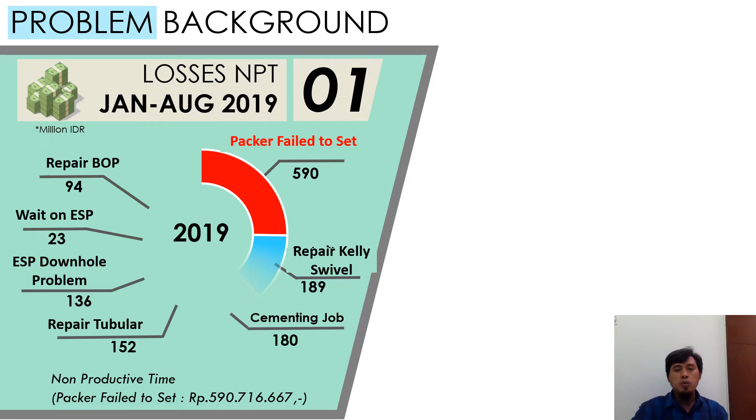To start this project, my team and I tried to find the background of the problem. First, during January until August 2019, there was much loss of time in well intervention jobs. We call it non-productive time, and the biggest one is packer fail to set. It costs about 590 million rupiah. And the second one is the KPI target from the well services department that must be achieved in 2019.

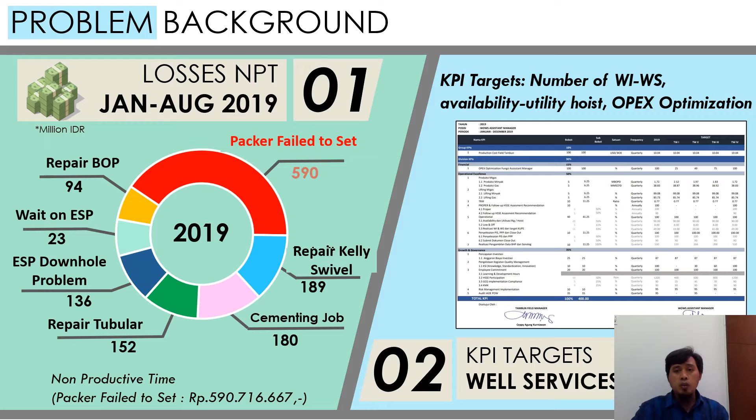And the KPI targets are number of well intervention and well services jobs, availability and utility of hoist, and also OPEX optimization. Setting a target to achieve is related with inspire a shared vision. I try to paint the big picture of what we want to achieve, and I speak with genuine conviction about the purpose of our work to my team.

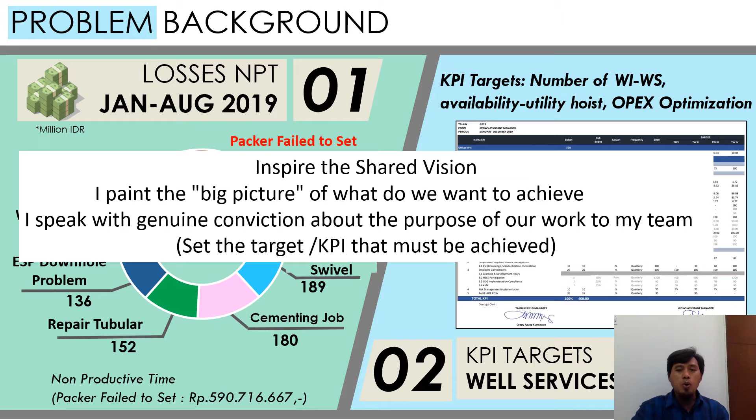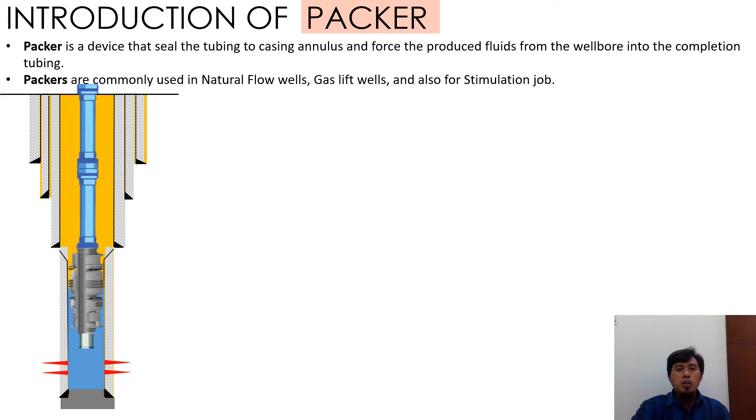The biggest cause of NPT is packer fail to set. Then the question is, what is a packer? A packer is a device that seals the tubing to casing annulus and forces the produced fluid from the wellbore into the completion tubing. Packers are commonly used in natural flow wells, gas lift wells, and also for stimulation jobs. Before we use a packer, the packer must pass a visual check. And this is the procedure.

First, make sure there is no damage to the thread on both the top and bottom connection. Second, make sure the grip is not dull and worn. Third, make sure the drag block is not worn. Fourth, the seal condition on the top sub must be clean so it can seal optimally. Fifth, the mandrel is clean from dirt or sand and has no scratches. And the last one, packing element: the two end elements are hard and one center element is soft.

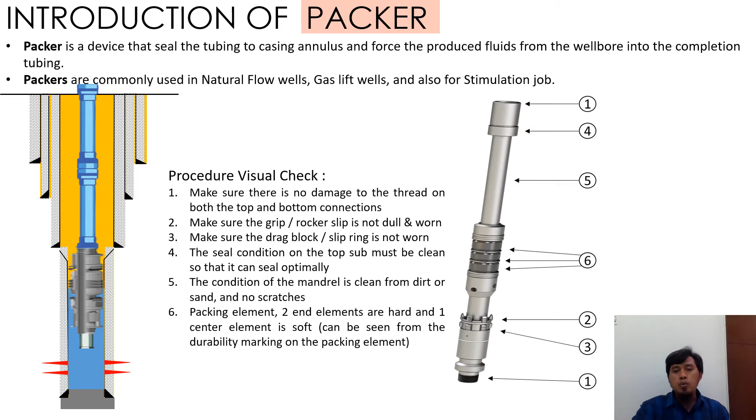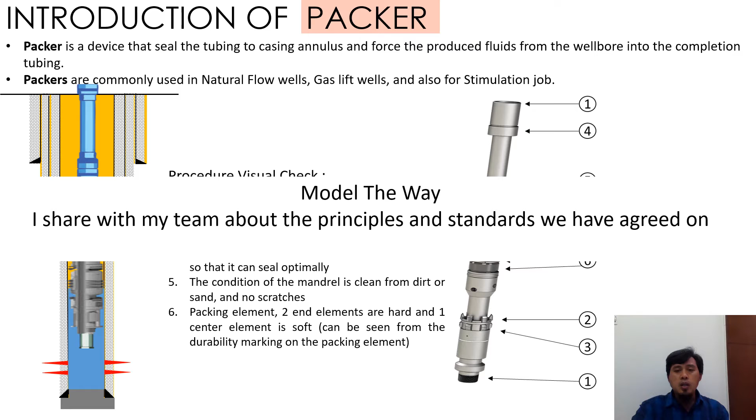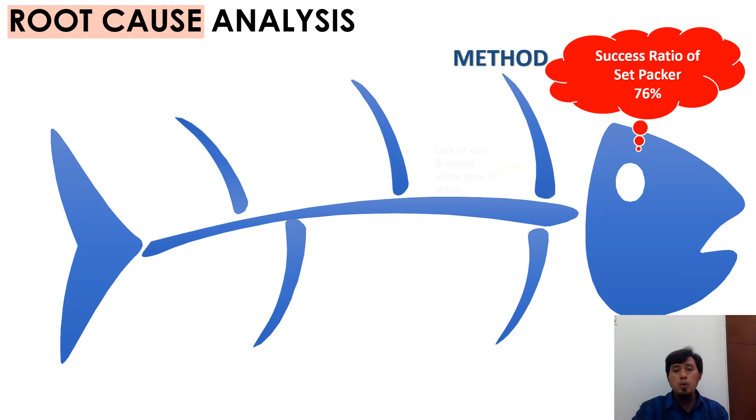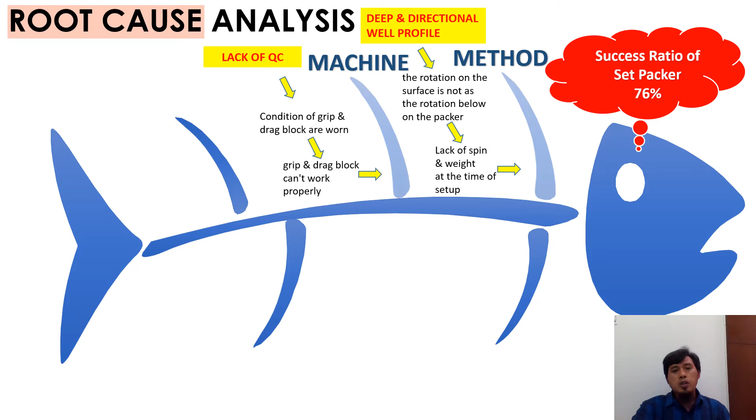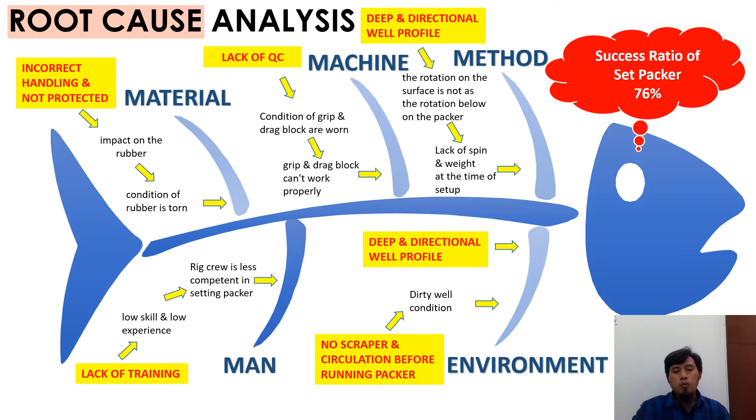The dominant cause of the method factor is deep and directional well profile. From machine, lack of quality control. For material, incorrect handling and packer not protected during shipping. From man, there is lack of training. And from environment, deep and directional well profile and also no scraper and circulation before running the packer.

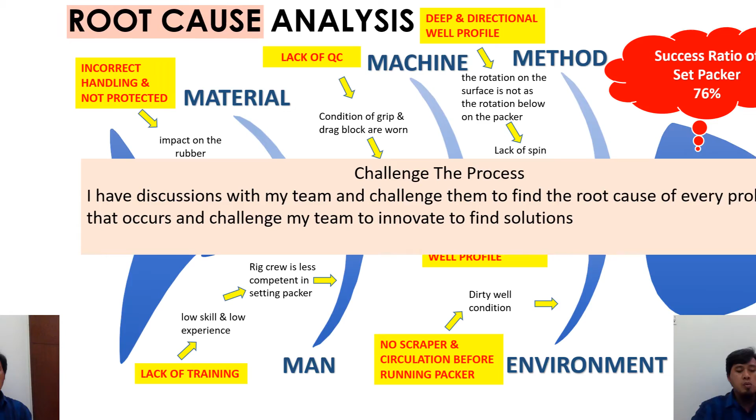Searching root cause is related with challenge the process. In this item, I have discussions with my team and challenge them to find the root cause of every problem that occurs and to innovate to find solutions. Based on the failure mode and effect analysis, the root causes were then assessed quantitatively, and the result is lack of quality control as the biggest cause of the problem, around 56%.

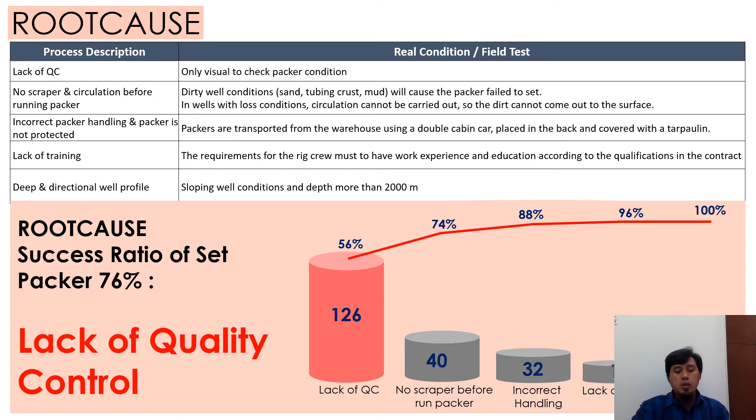From the dominant root cause, we then look for alternative solutions. There are three. First, making a PFAT tool as quality control of packer use. Second, using a new packer in every well. And third, provision of quality control expert services. Based on cost estimation, implementation duration, and low effort, high impact, making the PFAT tool as packer quality control is the best solution for this problem.

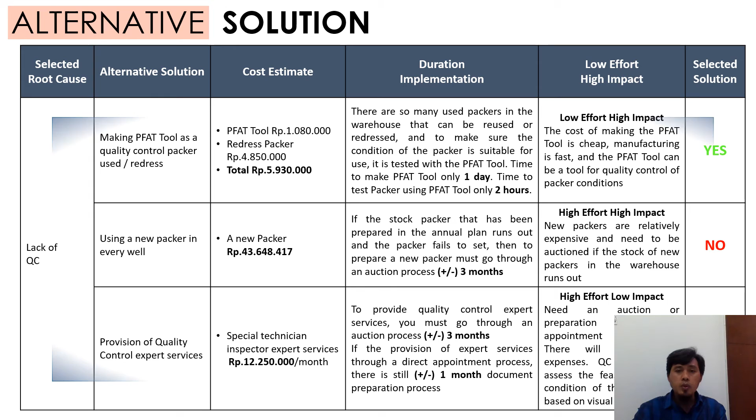I searched for alternative solutions by discussion with my team, which is related to enable others to act. I actively listen to various opinions from my team. I support decisions that have been agreed and selected by my team to realize a solution to the problem.

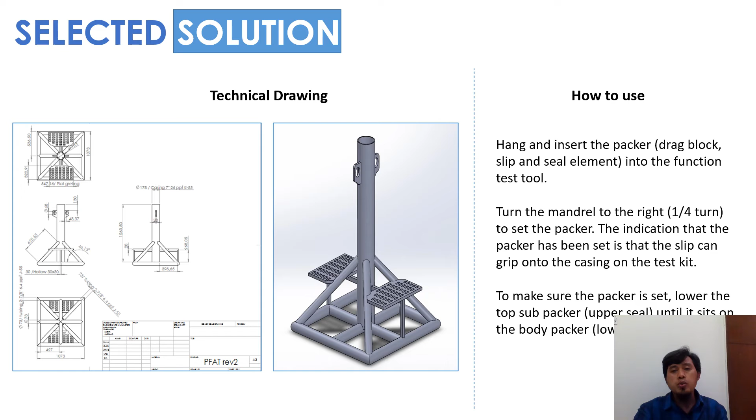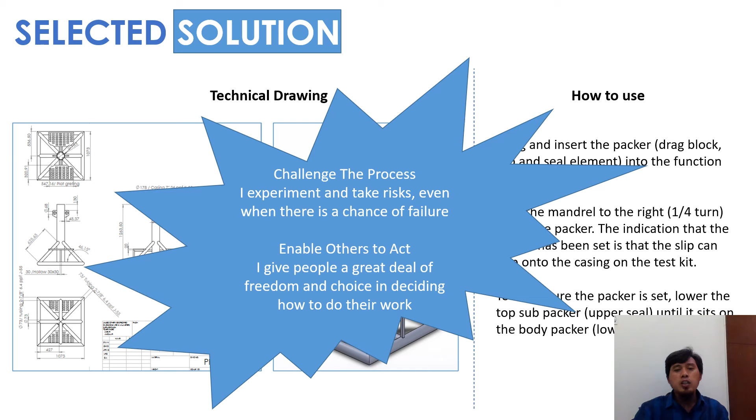After selecting the alternative solution, we create a tool. Making the tool begins with making a design using technical drawing and making a procedure for how to use the tool. In this step, I apply challenge the process. I experiment and take risks, even where there is a chance of failure. And the other one is enable others to act. I give people a great deal of freedom and choice in deciding how to do their work.

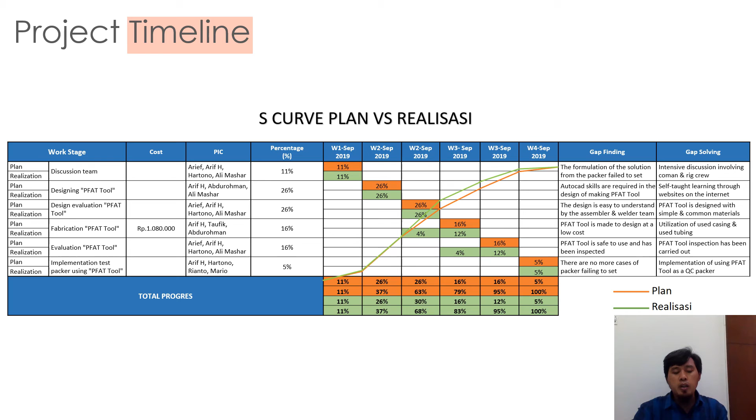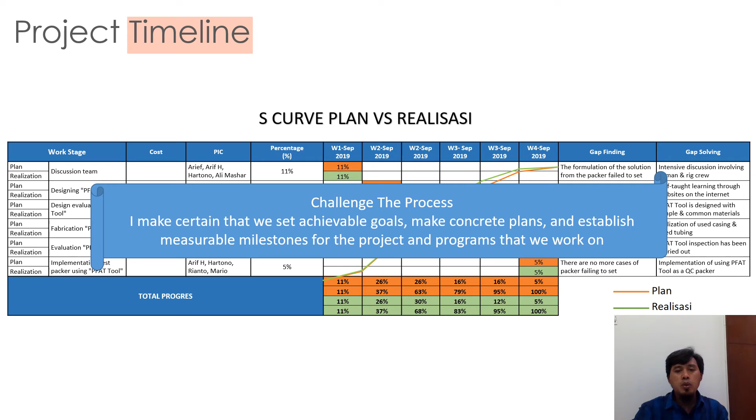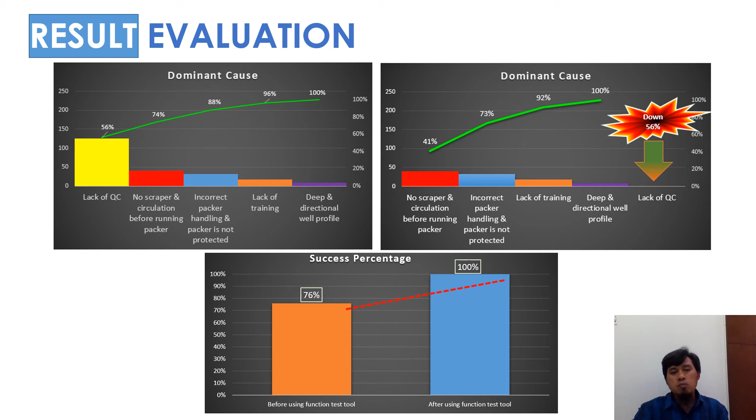After implementing the PFAT tool, this is the result. Packers can be set 100%, so the main root cause, lack of quality control, has been successfully resolved. You can see it on the Pareto chart. This is the summary and value creation. From quality, set packer successfully done 100%. From KPI, availability and utility of hoist achieved 105%.

From cost, we can save about 590 million rupiah, and KPI OPEX optimization achieved 106%. From delivery, it saved 134 hours of production time, and KPI realization of well intervention and well services jobs achieved 105%.

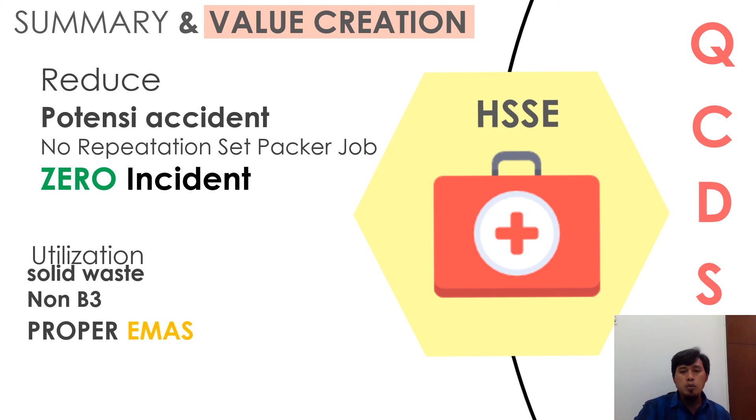From safety, we can reduce potential accidents, with no repetition of set packer jobs and zero incidents. Also, we can utilize non-B3 solid waste and we got gold PROPER. From morale, the crew is more comfortable at work, as found by a questionnaire we gave them.